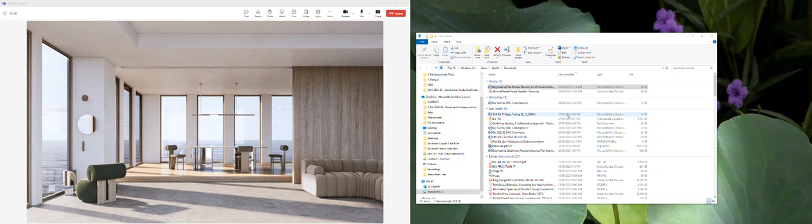You look at the transport info line to see if it had some information? Yes, the information is correct. But then when I get on the train, I stay on the train and they keep waiting for another bus coming from Newcastle. And I asked the driver, hey, what happens? Because on the schedule, I see this early morning it works. And then he say, yeah, we're running, but we have to wait for another bus. And I say, how long? He say, I have no idea. Oh my gosh.

So was there a problem on the line? I have no idea. They say at the moment they have only two lines, I mean bus and trains that support that, and that's the thing. They completely rely on this, and I say, "Can I leave feedback for the administration here about the way you operate the train, because I completely rely on the train schedule." He say, sometimes it has to be like this, and I say, "Oh my god!" And that's why I call you. Yeah, no, fair enough. Perfectly understandable.

So do you want to just show your screen, what the error with DRAINS is? Okay, I show you now. May I turn off the camera so the speaker is going to be better? Of course. There we go. And I give you the control as well. So screen, full screen. Can you see it? And I give you the control. Oh, I can't operate your DRAINS model from here. I can only operate the chat window. Stop sharing again.

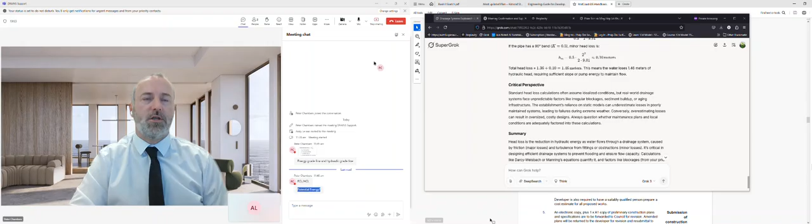Hang on. Remember the definition. So I'm just writing in the chat window. This potential energy is something. Do you know what that is? Energy for the gravitation. Potential energy, is it related to mass? Yes or no? Of the object and acceleration due to the gravity and the height of the point. Is it?

Yes, I'm listening. Please. Due to gravity, correct? Yeah.

Yes. So imagine a roller coaster for a moment. Thinking of a roller coaster? Hello? Yeah. So I'm asking. I want you to think of a roller coaster. Now imagine that you're going up to the top of the roller coaster and you stop, and you're getting ready to go down the roller coaster. Have you been on a roller coaster? Yes, I did. Okay, did many times before.

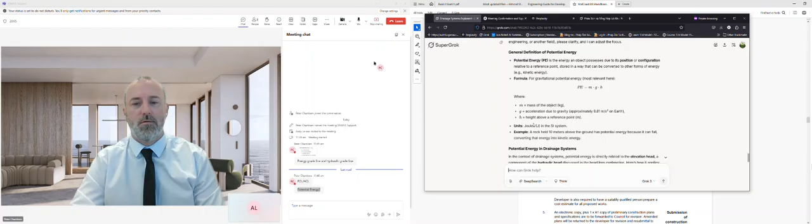Yeah. Hold on. Yes. Hold on. Yes. That's okay. All right. I'll send you a GIF of what it looks like. Rob? This is a roller coaster.

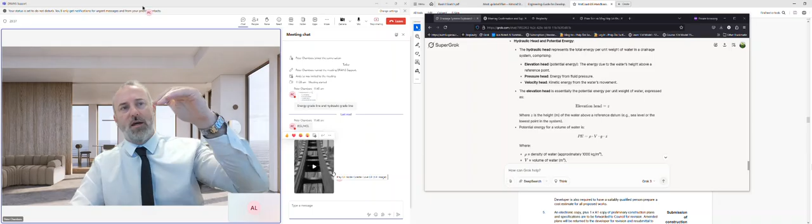Yes. Okay. So when it winches you up to the top, you stop, and that's potential energy. When you go down the hill, the potential energy is dropped, and the potential energy becomes kinetic energy, like the energy of movement. So the velocity and the speed is based on how high you are and how far you fall. So gravity converts that mass into energy.

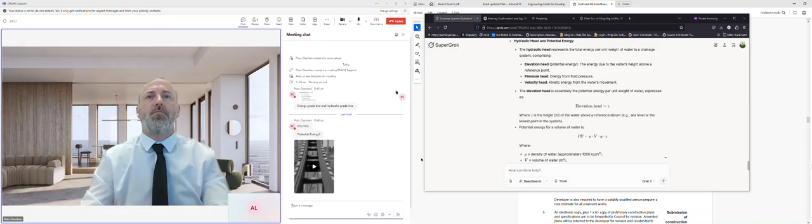So it goes from, I beg your pardon? Yes, I do. Please go. Yes. Yep. Along so far? I said, are you following what I'm saying? Like, do you understand? Yes.

Yeah, perfect. Okay. So this is the same for water in a pipeline. So water starts at a higher point in the system, and then it goes from potential energy to kinetic energy to flow through the pipe. So because the water is at a higher point and it wants to go down to a lower point, that's why it moves. And the way that we plot it, if you look at a long section, is you'll see a line being drawn on top of the pipe. And that line is called the hydraulic grade line.

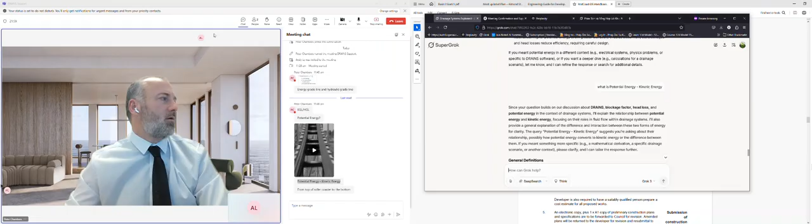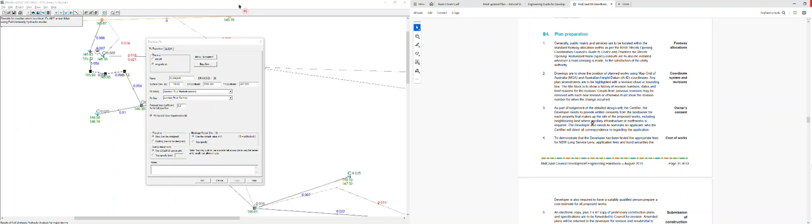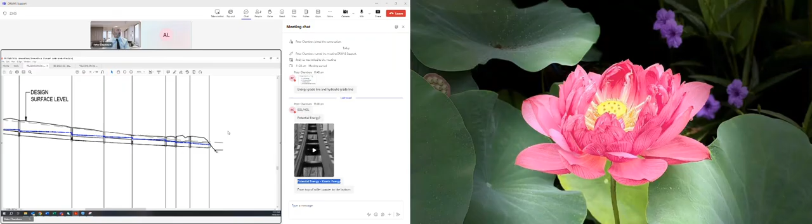See that blue line? Okay, so this is for a drainage pipe that's connecting into something that drops off quickly and looks like a basin, yeah? So there'll be a head wall here, putting water into the basin. They're assuming for this design storm, or wherever it discharges to, I'll have to check it, this is the top water level here at the basin for the design storm.

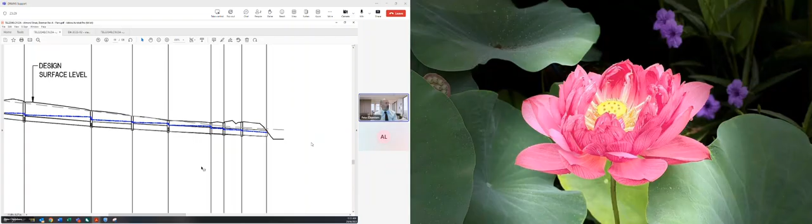So if this pipe is designed for a 5 or a 10-year average recurrence interval, so a storm that happens between like a 20% storm or a 10% storm. I'll just show you what I mean. So a 10-year ARI, or average recurrence interval, is a 10% average... following that on screen there.

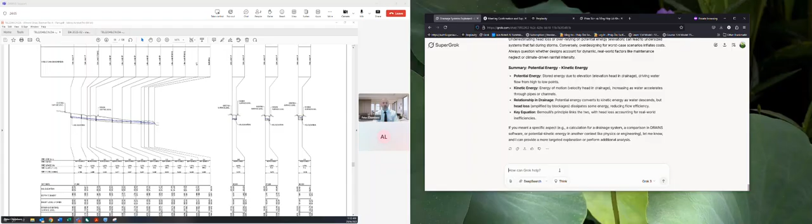So this here, the 10% average exceedance probability, relates to every year you've got a 10% chance that you'll get a storm of that magnitude or greater. In the old days, they referred to it as an average. But what people thought is that if you got a 10-year storm this year, you won't get another 10-year storm for another 10 years because it should follow the average.

But what it means is you could get 3 years with 4 10-year storms and then get no 10-year storms for the next 40 years. But on average, it's every 10 years. So instead, they've changed the way they described it to a 10% average exceedance probability. So there's a 10% chance every year you'll get a storm that big or larger. So depending on what our DCP says for the design of this pipeline, they have to design for a particular size storm.

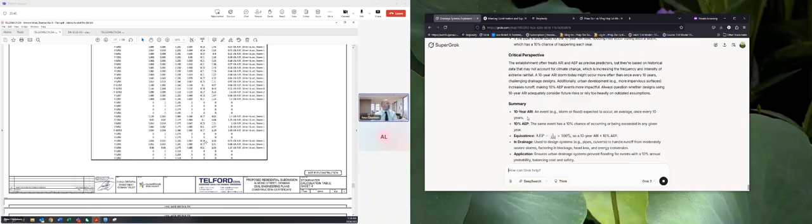And I'm just going to roll down here and see what they've included on their pit set out table. Okay, so that's drains, that's the 1% storm there. I don't know why they put that first. 1% storm, 1%, 1%, 10%. Okay. So this 10% AEP storm means that this is what the pipes are designed for. They're designed to handle this 10-year average storm. So it's a big storm, but it's not the biggest. Does that make sense? So the pipes are designed for a big storm, but not the biggest.

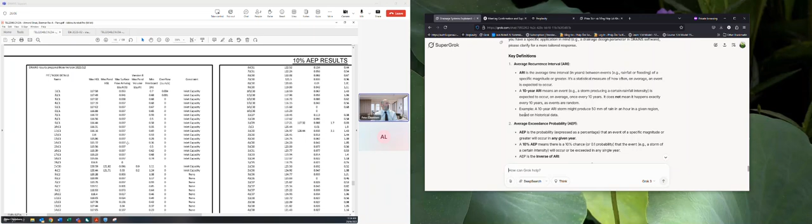So over here, what they've got, hang on, why is this not activating? It's going all funny. Come on. Right, it's just going to poop its pants for a minute, so I'm going to have to wait for it. Right, okay, it's activated now. Here we go. Stuffed up again. It's probably just trying to process too much data at once. Yeah, but it could also be the density of the image on the screen. It could be too dense. I'm just going to chop it while I wait. Come on. Right, I'm just going to scroll up and see if I can scroll out of here.

So for the rain, can I ask you something related to the DRAINS model? Hello? So step by step, the first thing when you open the DRAINS model, what are you going to look at first, and where are you going? Yes, I was nodding yes. Yes.

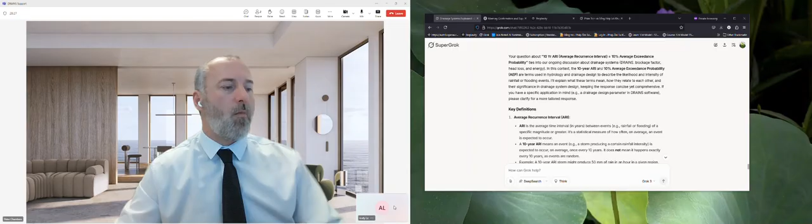All right, I'm going to have to do a full shutdown on that. Task manager. There we go, we're back in task. Go away, whatever. Okay, open up those plans again.

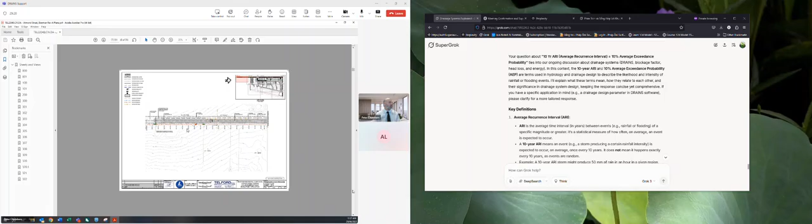So it's stormwater longitudinal details, catchment plan, 400. So go down to 400, wherever it is. 100, a bit further. Yes, we worked together before for this one. All right. I'm listening and thinking. So have you seen a catchment plan before? Yeah. Do you know how a catchment plan is calculated?

Do you know how a catchment plan is calculated, Andy? No, I'm asking if you know how a catchment plan is calculated. How they work out where those blue lines go, the red lines. Do you know how they do it? I'll explain if you don't know, but I don't want to just explain everything to you if you know some things. Do you know how they set up these red lines?

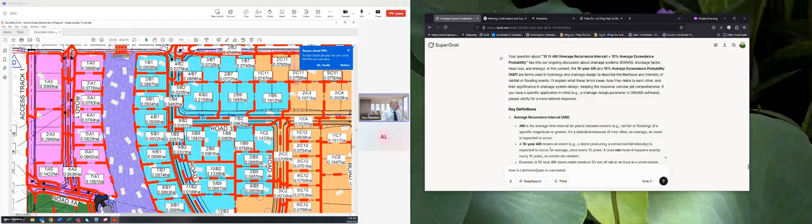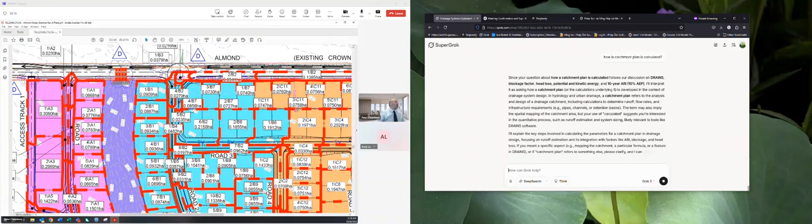No? Okay. So each of these stormwater pits that they've got over here, they choose the location for where they think the stormwater pits need to go. So over here, for example, I'll just click on that again, clean it up. That stormwater pit there has got some contours. The contours show the direction that it points, pointing in the downstream direction.

So this level here and this level here is the same. But from here to here, the water level drops, I think. Oh, I think that's correct. Anyway, sorry, I'm making this confusing. This stormwater pit here, all of this area around it, so there's a stormwater pit there, hidden under that box.

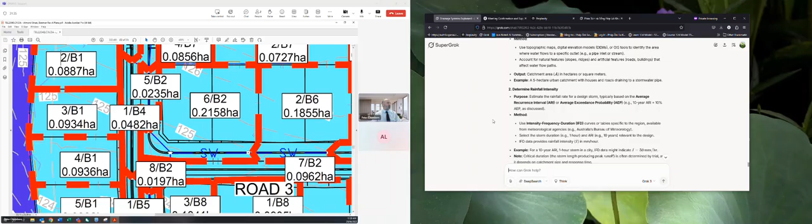So everything that lands on this property goes perpendicular to those contours. See what I mean? So all of these lines join at a right angle to work out where the raindrops go. So you go perpendicular down here to work out where the water lands. Now, if the water lands here, and this is downstream, well, it can't get into this pit. Once it gets past this point, it's sailing down the road to this pit.

So any water from this area in here is following this contour down to the road and going into the next pit. Does that make sense? So any water that lands on this block goes down here and goes into this pit. So this pit here is determined by following two things: a fence line and the contours.

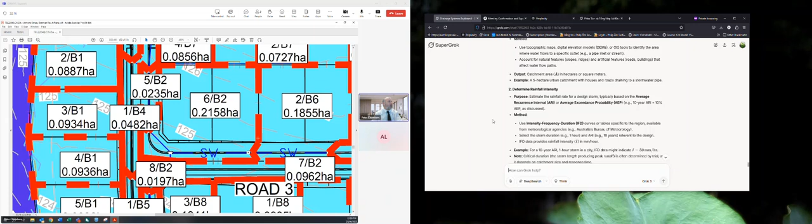Now, the only exception to this rule is if this is a rural fence, then there's a good chance that the catchment plan may not be correct. Can we get the legend? Have you seen a rural fence? Do you know what they look like? I'll show you. I'll go to Google Maps and I'll show you a picture of it. That all makes sense. Yes.

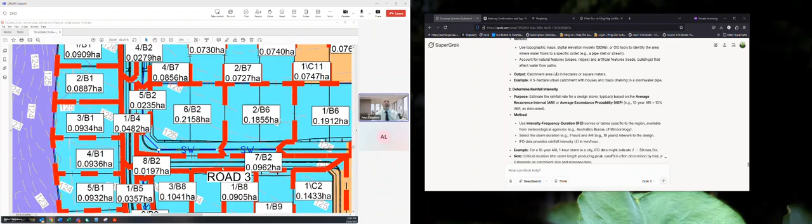Just go to Queen Street for a sec. Yes, I did before. So Cassidy, this is a good example. Now, is this appearing on your screen? The fence? Now you see that rural fence? Yep. So this rural fence here, for example,

is the kind of fence type that they use for semi-rural areas. So what that means is that if water goes up to that boundary, it may not be stopped by that boundary. So this is on Queen Street. This is a rural area.

So that wooden fence all around it is very similar in most areas. So over here, rural fence again. That means water is not really being stopped by the boundary. So your typical urban subdivision rules may not apply. So if we go to Ironbark Ridge,

right, see that rural fence? So the question is, if this is a rural fence, what's stopping the water from this man's property going across to this man's property? What's stopping the water? No. So if it goes down the driveway here and the driveway is angled towards this man's block over here, what stops this water from going here instead of out to the road? Does this fence stop it?

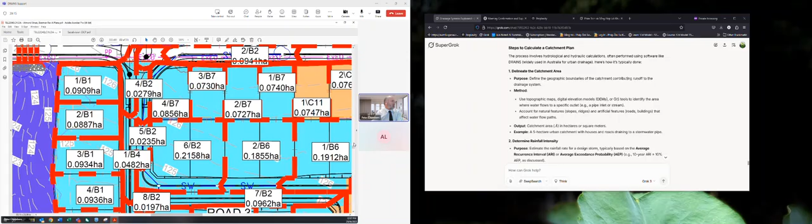So if we're looking at that, righto. So we've got that information. Now we'll look at the subdivision DCP. Use the word fencing. Try the word rural. Next, rural or rural subdivisions. Yeah, so we'll keep going down. Provide some information. Hold on.

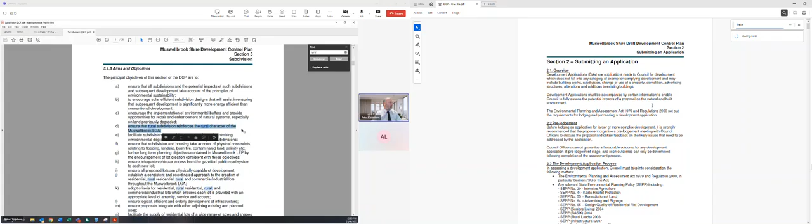Subdivisions and potential impacts, solar efficient implementation of environmental buffers. Ensure that rural subdivision reinforces the rural character of our area. So the character of the area would also probably include the fences. So the question is, that rural fencing, would that be something that they would put on themselves for a subdivision? No. Is it something that the person would put on later?

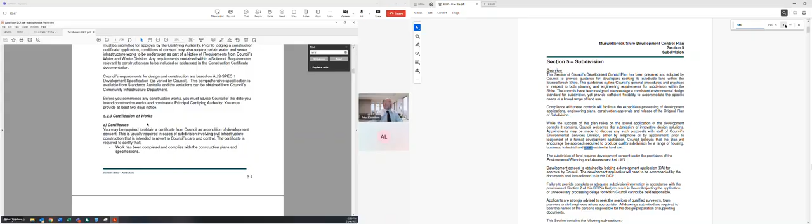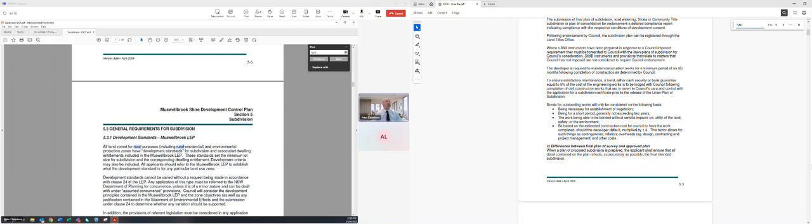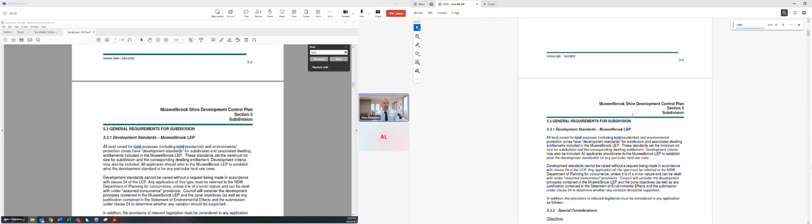So this is the DCP for the area. So we should review this in conjunction with our other subdivision DCP. So this section complements the provisions in our local environment plan and our development control plan, blah, blah, blah. So it says here's the area, right? So as far as we're concerned, this is our subject site.

So new development maintains the village character of Denman. Framework for water management, blah, blah, blah. Structure, staging plan, service strategy, open space, landscape, built form. Let's try that. Provide a built form consistent with that of a rural town or village.

New dwellings with frontage to Armand Street should have the appearance of a detached dwelling in order to maintain the low density streetscape. Should be designed, sited, and constructed to minimise the impact of railway or highway noise or vibration. Development along the west and northwest boundary should give consideration to bushfire risk. Biodiversity, highway and rail noise, dirt.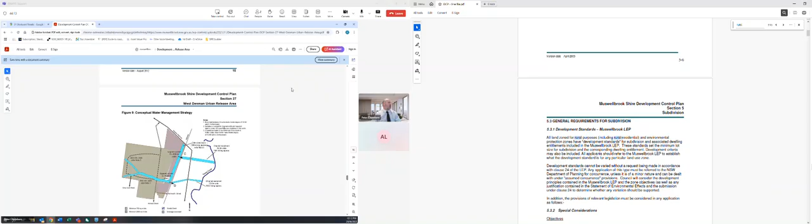And then channel geometry, batter slopes of 1 in 6 high. So they're only meant to have 1 in 6 batters and 300 mil freeboard. So when it goes through our site, it's meant to have 1 in 6 batters. Currently, it has 1 in 3. So they're not in accordance with the DCP, if you know what I mean. So that's something we have to go back to them and go, well, this is not being designed in accordance with the DCP.

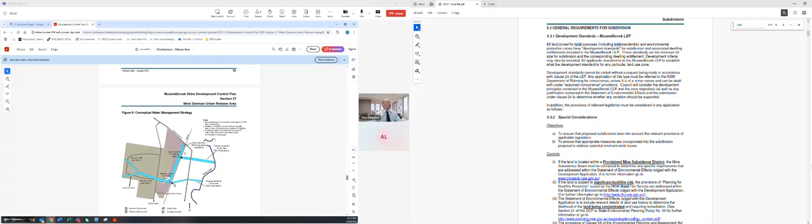Let's just go down the list from the top. Let's take it from the top. Yep. Probably easier to read from the top than the bottom. Right. So if you just type in Denman DCP 27, you'll probably find it. Okay. So you are at page 2. Okay.

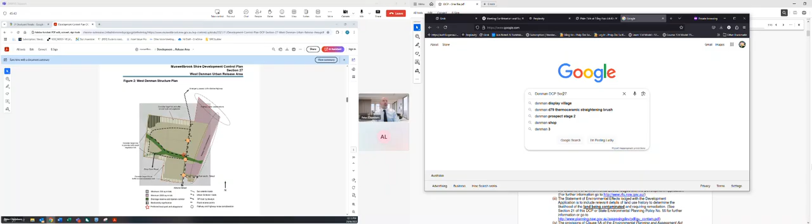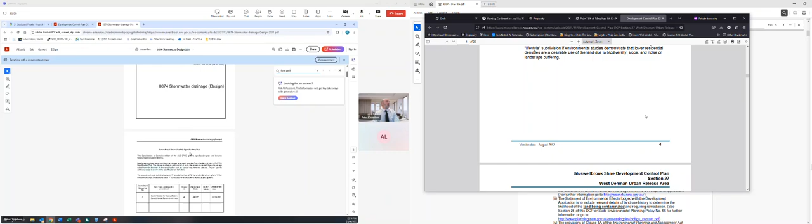Okay, I've now found it. Oh, okay, there's another thing in the DCP. Oh, sorry, the AUS-SPEC here. So it's all right. Minor and major system set out. Blah blah blah. Major system, which is down the channels. Minor system carrying flows for more frequent runoff events. I'll look if there's any other details. Yep.

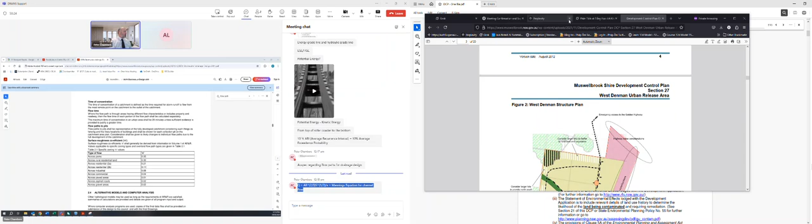Now, A is the hydraulic area, R is the hydraulic radius, S is the slope, N is the roughness factor. So that's where these numbers come in for N. So you see the N there? That relates to Manning's. So that's the Manning's equation. So you can look that up anyway. Manning's equation is a channel equation. It's a very common equation you would use to work out that everything works.

Alternative models of the hydraulic models can be used as long as it's satisfied. Blah, blah, blah. Give us the final data files. So there's information in here. Hydraulic grade line. Downstream control. Okay. So the known grade line level from downstream calculations, including pit losses at the starting point, where the downstream starting point is a pit and hydraulic grade is unknown, a level of 150 millimetres below the invert of the pit outlet is to be adopted. So below the bottom of the pipe, 150 below the bottom of the pipe.

Where an outlet is, and the design storm is a minor event, the top of the outlet of the pipe shall be the downstream control. Where the outlet is in an open channel, design storm is the major event, and downstream flood levels are not known, the top of the outlet pipe shall be the control. So it's basically saying that the pipe is full up to the top of the pipe. So if the outlet is an open channel, the design storm is a major event and downstream flood levels are known, the downstream flood control shall be the 1% probability flood level.

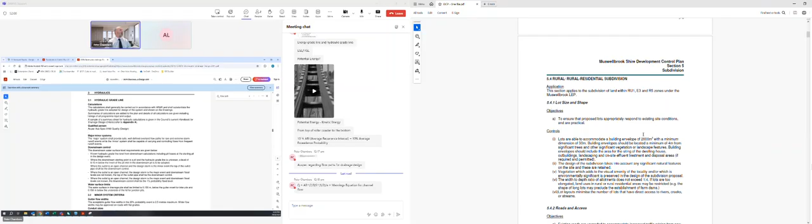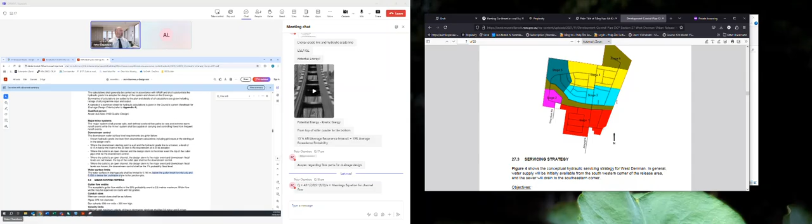Yes. Water surface and drainage pits shall be limited to 150 millimetres below the gutter invert for inlet pits and 150 millimetres below the underside of the lid for junction pits. So yes. Water should not come out of it. Does that make sense? Yep. Okay. So when we're talking about flow paths, we need to understand the fencing. Doesn't it?

But here's the other part. These are also smaller blocks. Yeah? They're not tiny, they're bigger, right? So here you would expect a big house to be in the middle. Yes. So any water from that house is going to be taken to the street through a square box section. So a small kerb inlet pipe, either a circular or a square pipe from the roof to the gutter. Yep. So that means that only some of the water around the house can get through the fence. Does that make sense?

But that means that, in many of these backyards, the water droplet could come down here following the contour, hit the house, go along the house, and then follow the house down to here or to the fence line. So these catchment areas are okay for these smaller blocks because the house and the fence will generally take the water from here down to the street because there's a house on it. Does that make sense? Okay.

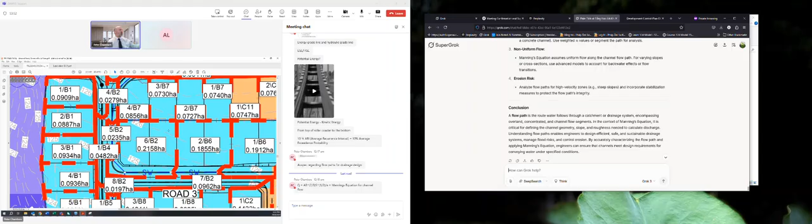Now let's look at the bigger blocks. Bigger blocks are a little bit more of a risk because the house could be in the middle but perpendicular. So the water here is going to go straight down to the road here. So that's correct. But because we know there's a pit under there somewhere, water from here, it's saying, is going to hit that fence and travel along the edge of the fence before it goes through to the pit. Maybe that's correct. These aren't perfect.

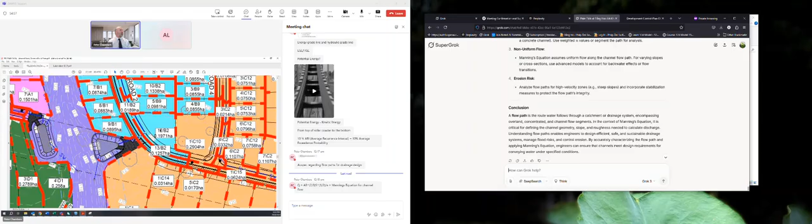Catchment designs are not perfect because you can't model every raindrop. It is meant to be like a good representation of what's happening, not a perfect representation. Does that make sense? So this kind of a plan is not meant to be perfect. It's meant to be a good guide, like not too bad. Like it's got to show logically that the water should be flowing in the right direction. So this is a pretty easy exercise for most engineers.

You go from the pit, you go at a perpendicular angle to the contour, and you follow along or you follow the fence line. So in this case, this fence line generally controls the water because there'll be a house in the middle. Fence will control some of it, blah, blah, blah. These two blocks here have a flat grade that generally takes their water down to here.

This one here is saying that because this grade is flat, and I think this water is going downhill here, I think it's saying that if the water lands there, it's going to travel along the fence to get through there. Maybe, maybe not, I'm not sure, but he's included that block. That's not too bad. Now, these blocks here are the tricky ones. These long blocks. Now, why are these long blocks different?

Yes. Go ahead. I'm thinking about the reason why the long block is going to be more. So think about the example I just gave of the house. Picture a house on that block. Yeah. Can you picture a house on that block in your head? Yeah. Yep. Yeah. So.

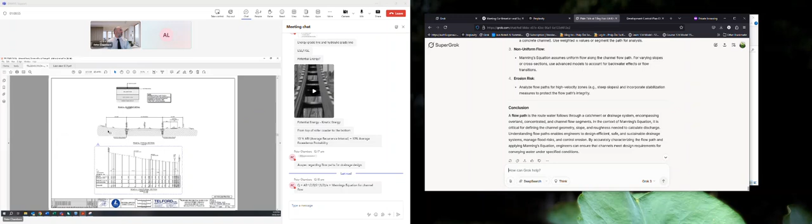Oh, you go back to... I just have to cough off camera.

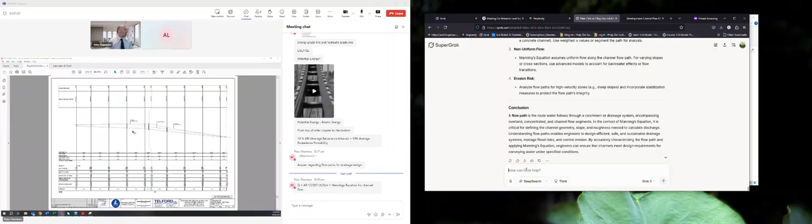Right, I'm just trying to find where it's got section views running through the space so I can see everything. Huh? This is all on the street, gentlemen. So I'm just looking for a section view that shows me what's happening through these different areas. I remember what set of plans I saw it on.

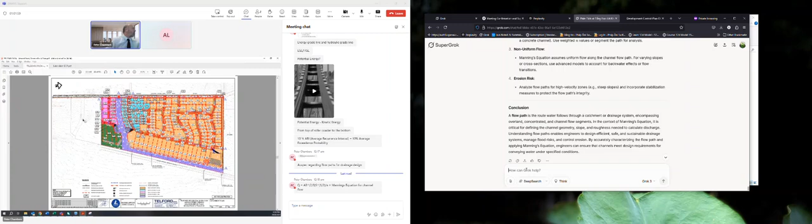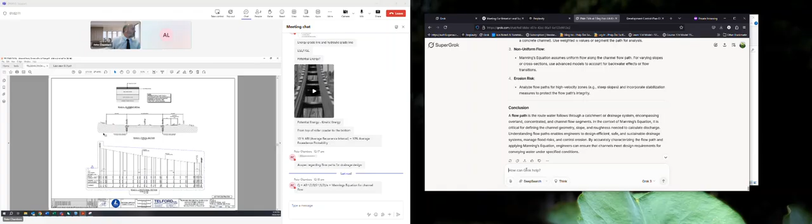So that's the road long sections, typical cross sections. Section A, right, so that's the swale at the back there, right? So section A, got to find where it shows section A. Let's go up. Section lines are... I did see sections on other plans. Just don't know why they're not in this set. That's very confusing.

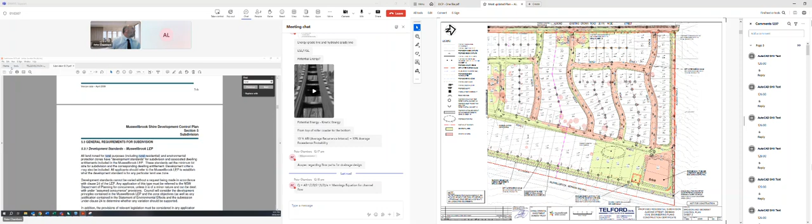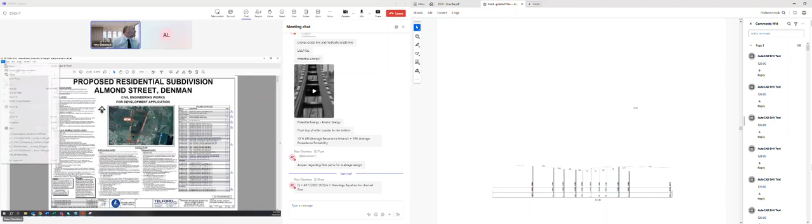Right, let's try. Yes. Oh, it's the same one. Oh, DA plans. Oh. And I had the sewer plans a minute ago. I'm just trying to find them.

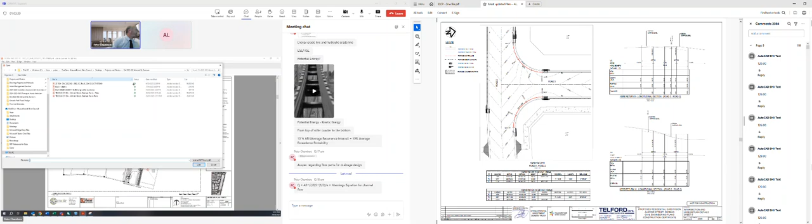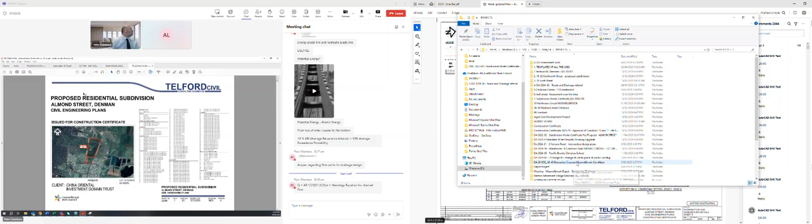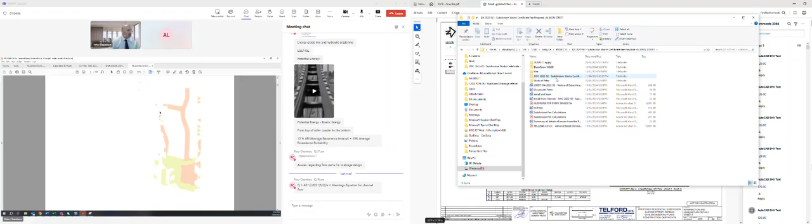What page is it? Oh, okay. So this is the other set of plans. Okay, so this might have the section. Here we go. Yep. Right. So see the section here. So anyway, it's one of the set of construction plans for bulk earthworks and all that. It's in the file folder in Content Manager.

Yeah. So anyway, I'll just need to get through this quickly because we've been on the phone for an hour and I just want to get you to a point where you can be more confident. So this is section C running through this block, right? So we've got the acoustic mound here. It's a typical section through a property. It'll kind of show us what's going on.

So we'll look for section C down through the plans here. A, B, D, no, B, D, C, right. So here is the road. So it's going from lot 362 up to the road. So we'll just go back and see where that kind of links in.

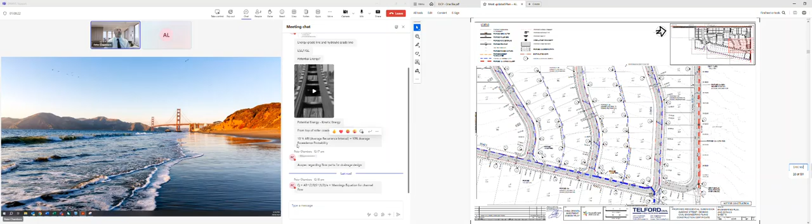So if we go to, where is it? Hang on, I'm getting confused with all these different drawings in different places. Hold on, let me just move this over there. Too much going on. That's that plan. Close those other ones because they don't help. All right, so here it's showing catchment plan draining to the road.

So somewhere along here, there'll be a section plan for earthworks to start, which shows that the water is being trapped by a batter, which he hasn't picked up on. So here, they're filling this area. We zoom in really close on the batter, see how this batter line is nearly touching the edge, and then that's a half point. That means this is the bottom of the batter. So water is being trapped along there.

So what he should have is there should actually be a pit in the corner there because 118, 119, 117. So water's draining down to this corner. Where's the stormwater pit for the corner of this yard? There is none. So if that's the top of the batter, then these should all have stormwater pits on the other side here. So lot 363, lot 362, lot 364 are not draining properly because of this fill area here.

So I'm going to make a note of that. So he's just missed it. So that stormwater pit there should have a connection either at the bottom of the batter and go across, or one there, one there to come across. So what I'm going to do is I'm just going to go Control All, go to my notes here.

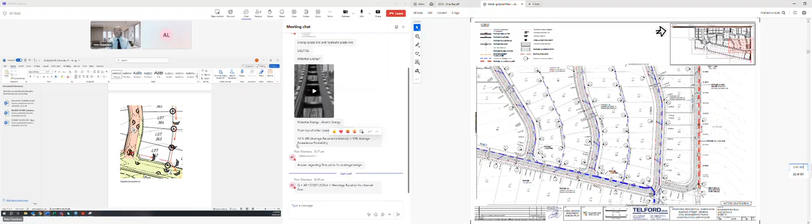Are you working on the work file you upload into? Oh, okay. All of this is Almond Street. This is all Denman. All of it. Yeah, so this is the one you've already got a link to.

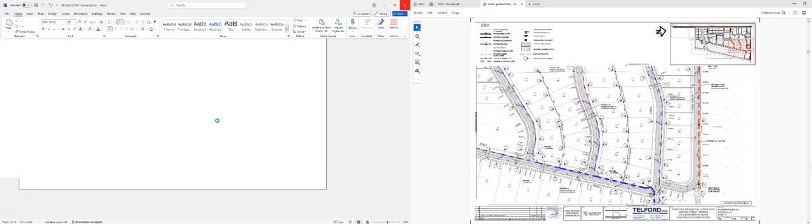The road is higher than the lots. Does that make sense? So the green area is fill. So if the road is higher than here, how does the water go that way? It doesn't. It would come out over here somewhere. That's if that's in cut. So the water would flow all the way over here down to this path here. And he's got these bags in the middle of the road here or whatever. That's not correct. It would actually be over here.

So these would disappear during construction of the roads, which would happen not long after the earthworks. So you've got your earthworks and then you've got your roads going in. So it's partially correct. He hasn't really staged it to show the two parts of the plans. All right, so let's just go to section view for the earthworks to show him. All right, so we're going to take that.

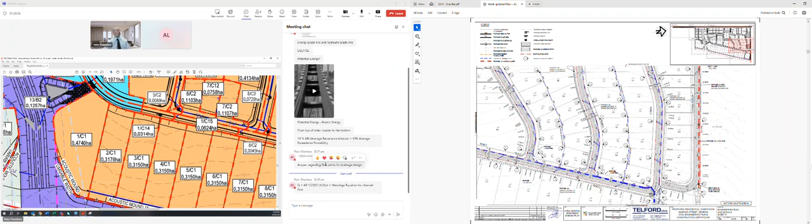No, not following? Okay, hang on. Let me bring up the detail here. Because my flow of thinking is slower, and then your question has just come in, and I know this is a lot of information. I do apologise. No, it's okay. I'm giving you a bit of a crash course because there's a lot of information that you need to do your job effectively. So I'm just trying to give you as much as I can. Go above. Yes.

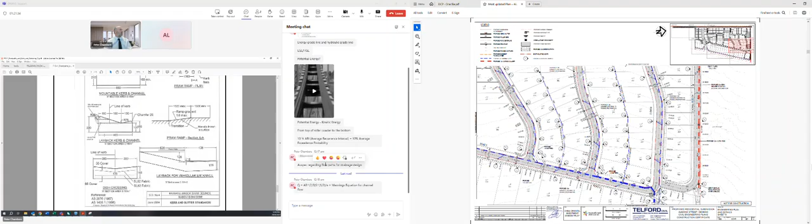Okay, see this? See how that's 150? That's the top of the curb. So when the road is flooded, you don't want the water to go above here. Into the channel, yes. If the water in the DRAINS model, when you've got overflow, in certain areas, you don't want this flow, the overflow. So you've got flow in your pipes, and you've got flow in your channel. The channel is your road. Your road becomes a channel.

Correct. So if the water is greater than 150 millimetres, it means the water goes over the curb and down the hill to the property. So now you've got uncontrolled floodwater going towards houses. So when you check the DRAINS model for this site, I don't know if it's on file or not. We have to ask for it if it's not there. But when we check the DRAINS model, we want to make sure that the sections through there do not exceed 150 millimetres.

So a little bit of water, we know that all footpaths go up by like 2% before they fall down. So when we look at our agreed road profile, even a road that goes downhill has a 2% grade going up. Then it can have a 10% grade going down. So there's always a little bit of grade going back to the curb and gutter. So that section along there, that triangle, is where the water is contained in the road.

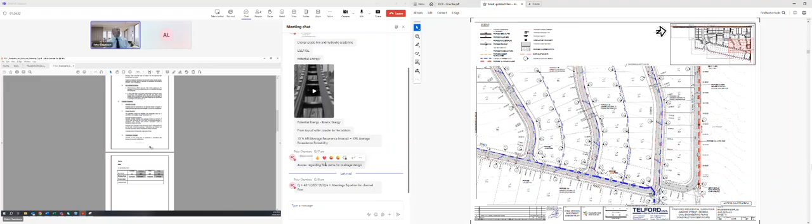So when you check the DRAINS model later, this is not for now, but for later, you'll be checking cross sections along this road here to make sure that that water doesn't go above the curb line, because if it does, it spills down into this property. Does that make sense? Just all very logical stuff.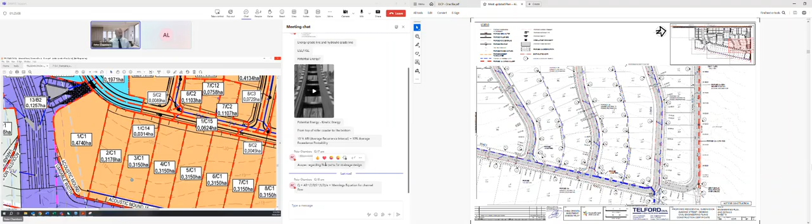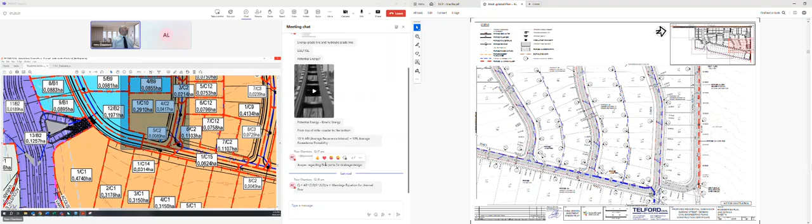Whoops. Hang on. Oh, that one dropped in the bin. Okay. Hi, Peter, I have a question. If I come back to the DRAINS model later by myself and run it, and I have any more questions, can I send an email and ask you? Sorry, there might be some stupid questions related to terminology that's still new to me. If I cannot find it on Google, can I just ask you? Yes, of course you can. Okay. All right. Yep.

Of course you can. Now, the key thing is when they've got HumeGard shown at the moment, we might have already told them HumeCeptor. So a HumeGard or a HumeCeptor will have a K factor for the pit.

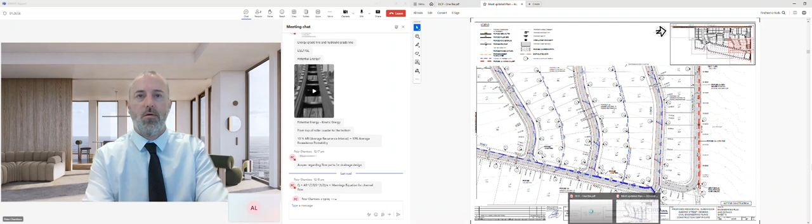Peter, before you go, can I ask you something? So at the moment, I'm still working on Almond. I finished my review of your assessment, but I am going ahead with the engineering plan and the earthwork. What I'm doing at the moment is going to documents related to assessment of the DA, for example the guidelines from Cessnock, Blacktown and Maitland about how they assess the DA. Do you have any advice for me, or do you think it's a waste of time to read all of these guidelines?

It's probably a bit of a waste of time because we're not actually getting anything done. So you remember the advice I gave to you the other day. I said what we need to do is review one thing and then go through the plans to check that thing. So I've already created more advice here. Reading and reading and reading won't teach you anything. You need to read and apply, because you need to reinforce the things you're doing, right?

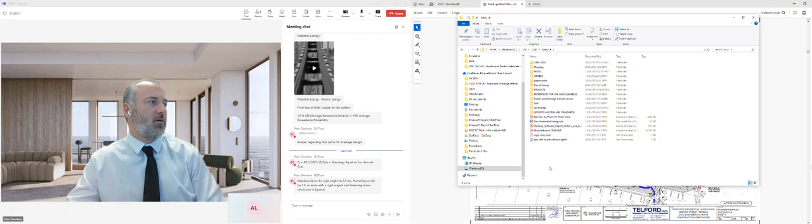So I want you to go through and include things like acoustic wall shown in section CC. So you might take a cut of the other end of the section and just say: may be used by residents for landscaping material. Recommend concrete V drain to create visual barrier to protect acoustic wall, for example. Now, we could have asked for that at DA stage.

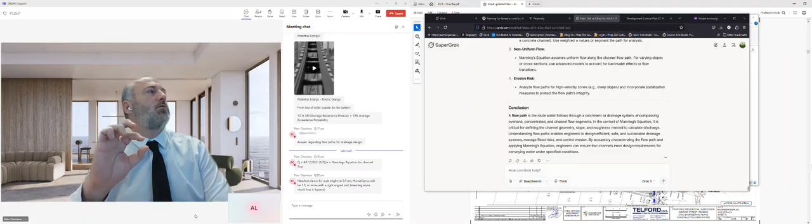It's only occurred to me now. But Peter, in the meantime, we need to get that Victoria Street one done as quickly as possible. That's more important than Armand Street, because we have the drains model. It should be quick to finish. Anything that we can get finished quickly. Would you like me to do that one? I want you to do your best on it. And if you are still struggling a bit, Andy, it's no problem. What criteria do you want me to assess, please? I'm happy to.

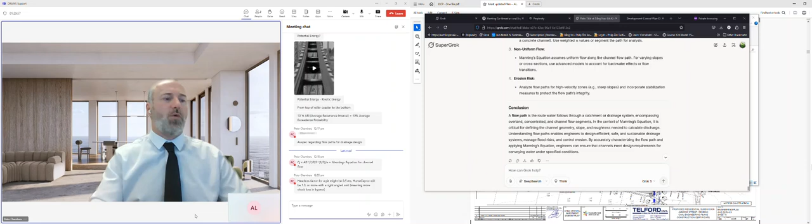Sure, sure. Yep, yep. Okay, so you see that note I just wrote you? Yeah, head loss factor in a pit might be 0.5, etc. HumeCeptor will be 1.3 with a right angle unit. So I'll write the reason why. So HumeGard specified wrong. Hang on, I'll just write this in the notes. Which window were you typing in? I don't see. Oh, here, I see you typing now. Okay. The pit icon saying HumeGard will have a K factor. Yeah. Hang on, I'm trying to write it all out.

Because what I'll probably need to do with you, Andy, is go through these projects line by line, section by section, and explain everything as we go. Actually, I'd really like to see a map, bullet points, to show everything. You're probably getting stuck and just not really sure how to do these jobs, and I probably need to sit down with you a lot more and take you through them. I can do every single work on my own, but I need you to show me the map, bullet points, so I can follow your progress. Yeah.

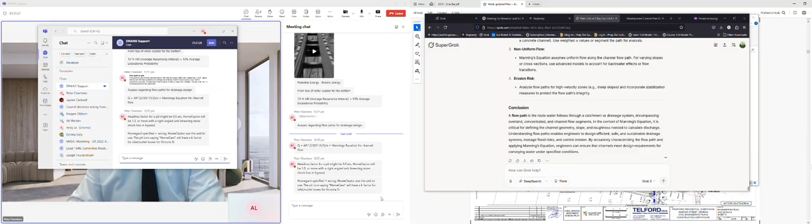Oh, yeah, like a checklist. Yes, correct. A checklist. So the reason I haven't done that yet is I haven't got time to write all of those bullet points, because there are so many parts to this that I can't create a template or an easy guide. If I go by my direction and you go another direction, then we don't have a common voice. So let me just look at my previous emails and see if I can find a checklist from one of the other councils. Hold on. Development checklist.

Yeah, but I didn't really know up till now that you were struggling with lots of things, that you haven't really got a lot of experience. So I'm trying to think about what I can do to help you understand better how to review things. There are probably lots of things you just need more help with, and that's not a bad thing. It just means you need more help. So that's why I'm trying to look up online and see any reference or guideline or checklist for reviewing engineering plans.

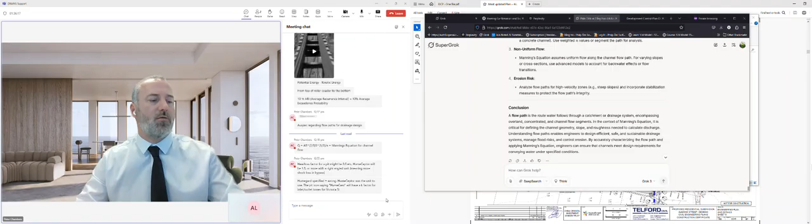So leave it with me. I'll think about what I can put in to help you see things through my eyes and help with a checklist. And that checklist will be related to the Denman job. So in the meantime, I want you to finish the Victoria Street job. I want you to click on the pit that says Humegard. I want you to check what the head loss factor for the pit is. And I want you to make it

like 1.8 or something. So HumeCeptor head loss factor is 1.3, but because it's a right-hand bend through the unit, it's probably going to be about 1.5, 1.8, something like that, and then rerun the model. And if it reruns the model and everything is okay, we tell them to put it in STC2 instead. You know what I mean?

All right, you run with that job for now because it's going to take me some time to write checklists for everything for you. So just give me a few hours because I'll need to punch through it as quickly as I can. Excellent.

Andy, it's okay. If you are honest with me and say that you're not sure what to do or how to do it, I will find ways to help you. That is my goal as a manager. So don't worry. If you're confused, just tell me you're confused. Just tell me you don't understand. Tell me you don't know. Just be totally open and honest and say, I don't know what to do. It's not embarrassing because it means that I will spend more time helping you. Because the time I spend helping you means that you can do that work on your own in the future.

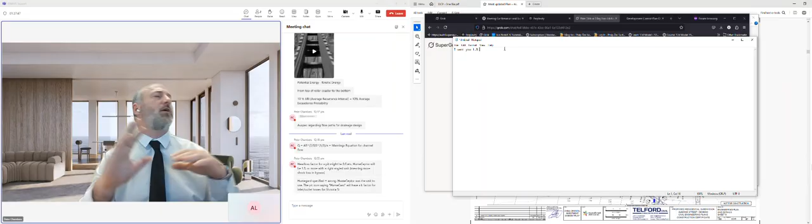Okay, so I follow what you told me to do. But if you've read through all of AUS-SPEC and you don't know where to begin, it means that you don't know how to apply the AUS-SPEC standards to the design. So I'll have to find ways of connecting that information for you to help you. Okay. Just do that first.

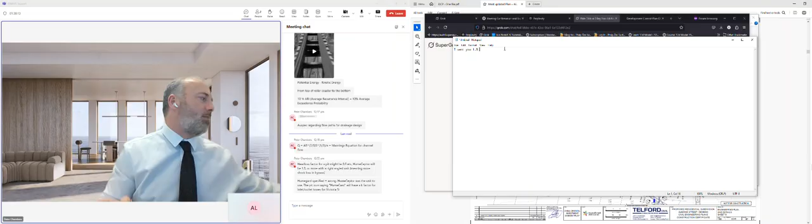I'll need a few hours to write up some documents for you and try and put in as many things as I would check as possible. And then I'll send it through to you to help guide you while I'm away on my leave, because I do need to give you that guide, otherwise you'll get stuck. So I'm happy to do that, because